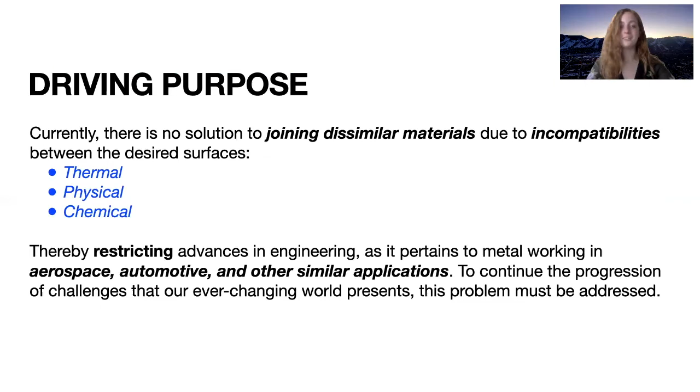So we have two primary objectives. The first one is to understand how the composition of multi-principal element alloys affects the diffusion and deformation mechanisms. And the second one is to design MPEAs that can act as a diffusion barrier to enable joining of incompatible materials while maintaining a physical interlayer which reflects the desired physical outcome required of its application.

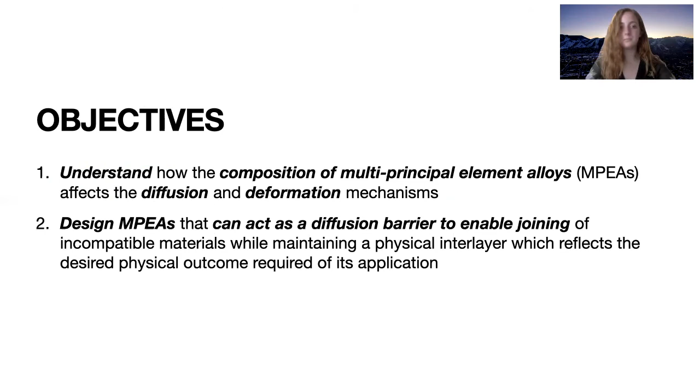So here are our methods. First, we have a basic game plan of how we wanted to attack our research. So task one, we wanted to make sure that we had a pretty strong understanding of some great alloys that we could actually work with. So first, we pared down all of our options with computational composition design, which we'll get into later. And then from there, we did some sample fabrication of our top ranked alloys, like which ones performed well in our computational composition design. And then we moved on from there.

The third task is to test diffusion behavior. Task 4 is to test phase stability. And task 5 was to understand the mechanical properties that these new MPEAs would present and really test them and make sure that they were giving us the physical outcomes we desired.

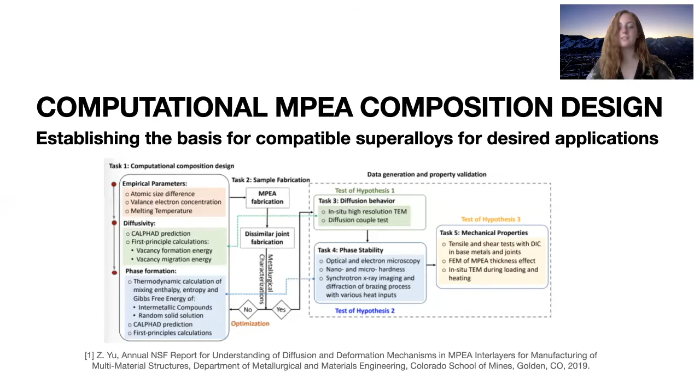So first, our computational MPEA composition design was a 3-step process employed to determine filler alloys for specific applications, which we have at the bottom of the screen. So first, there was a filtration code that was written in MATLAB to rank MPEA systems depending on the compatibility. This compatibility was between thermal, chemical, and physical compatibility.

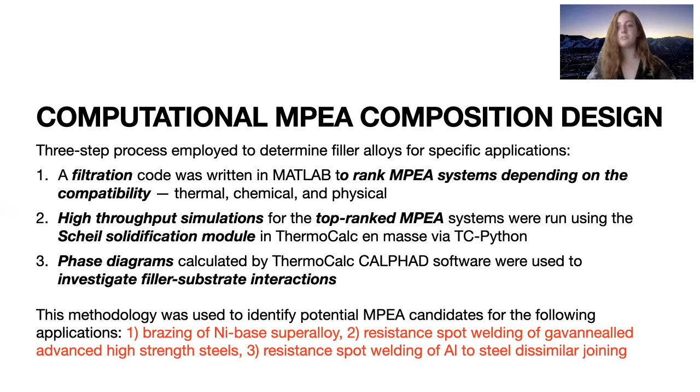The second step was high throughput simulations for the top ranked MPEA systems were run using the Scheil solidification module in Thermo-Calc via TC-Python. The third and final step was phase diagrams calculated by Thermo-Calc CALPHAD software were used to investigate filler substrate interactions. So this methodology was used for the 3 applications described below.

So first, here's a basic understanding of what our filtration code consisted of. So you can see on the left-hand side of the screen, it's just kind of a diagram explaining the physical dimensioning of our alloys that we were trying to figure out. And the highest ranked for this specific nickel-based alloy that we were looking for, you can see it on the screen below. And then to the right, you can see the order of filtration.

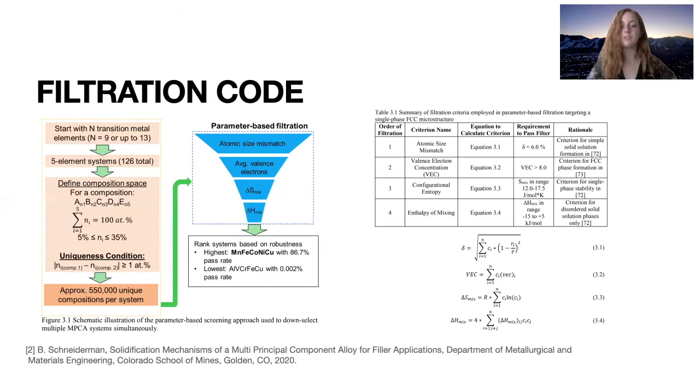So first it went through an atomic size mismatch, then a VEC or valence electron concentration criteria, then a configurational entropy criteria, and finally enthalpy of mixing. So we needed to make sure that these 4 criteria were met in order for us to feel confident about our microstructures of our MPEAs.

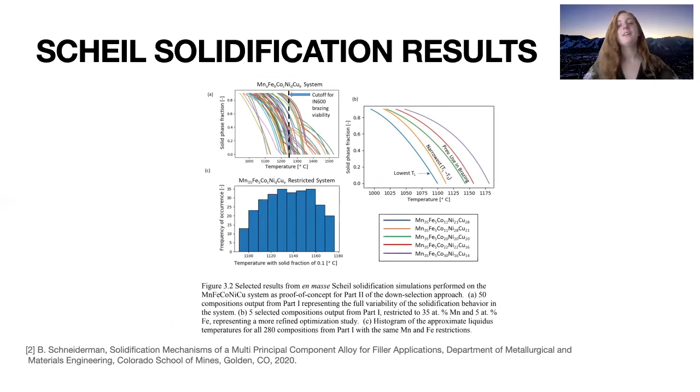So here are some basic Scheil solidification results we got from the same nickel-based alloy, which you can pause and watch if you want to. And then here's some examples of our brazing for our nickel-based superalloy, our sample fabrication. So here's our composition that we came up with.

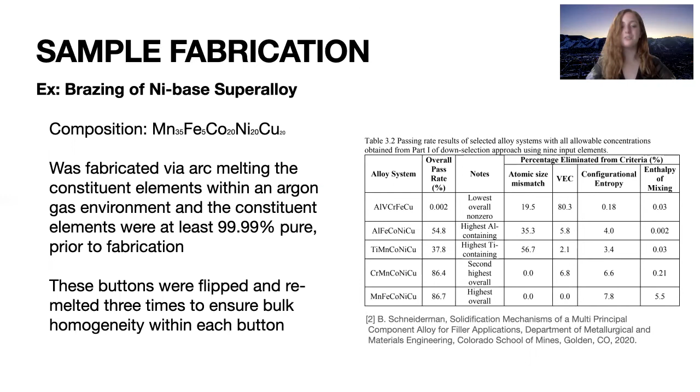And it was fabricated via arc melting of the constituent elements, which were at least 99.99% pure prior to fabrication. And with these buttons we really wanted to make sure that they were homogeneous. So they were remelted 3 times to make sure that it had bulk homogeneity before we moved on to further testing.

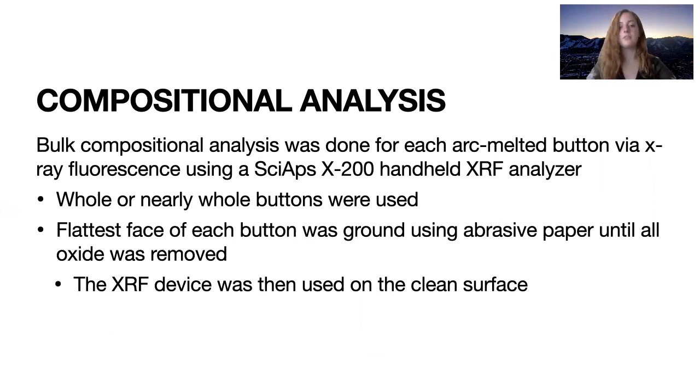So next we did some compositional analysis. Bulk compositional analysis was done for each arc melted button via X-ray fluorescence using the SciAps X-200 handheld XRF analyzer. So whole or nearly whole buttons were used, and the flattest face of each button was ground using 240 grit abrasive paper until all of the oxide was removed so that we could get a clean scan. And then the XRF device was used on that clean surface.

So what work are we currently working on? So present work as of January 2021, we're currently working with an alloy, which I'm not allowed to discuss because it's unpublished, but we're having some success with this alloy. But we have a processing route for how we want to mechanically test it.

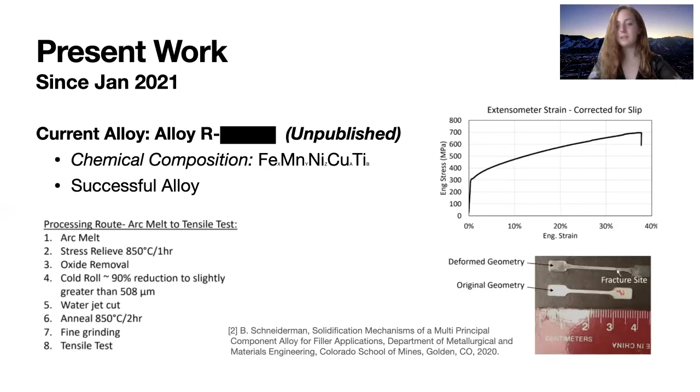So first we're trying to arc melt the button, and then we're going to stress relieve it at 850 degrees Celsius for an hour. And then we're going to use the 240 grit paper to do some oxide removal, then cold roll it, and then use a water jet cut and anneal at 850 degrees Celsius for 2 hours, and then do some fine grinding, and then finally we'll do a tensile test, which you can see on the right-hand side of the screen. That's an example of what we're going to be doing.

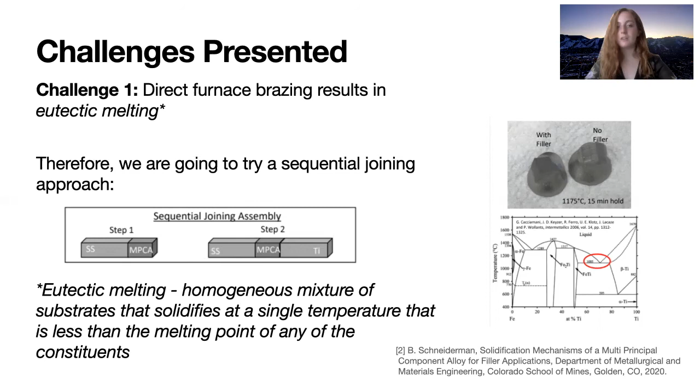So some of the challenges that are currently being presented, one, direct furnace brazing results in eutectic melting, which is not what we're looking for. Eutectic melting is a homogeneous mixture of substrates that solidifies at a single temperature that's less than the melting point of any of its constituents. So what we're going to try to do in upcoming months is to try a sequential joining approach in the vacuum furnace. And here are some of the results we've yielded with the direct furnace brazing prior to our sequential joining assembly.

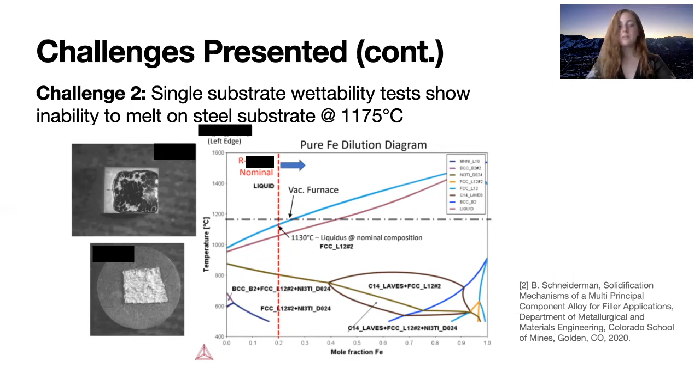And then the second challenge we're seeing right now is that we have a single substrate wettability test showing an inability to melt on a steel substrate at 1175 degrees Celsius. So we're looking to increase the temperature and see how that pans out for us.

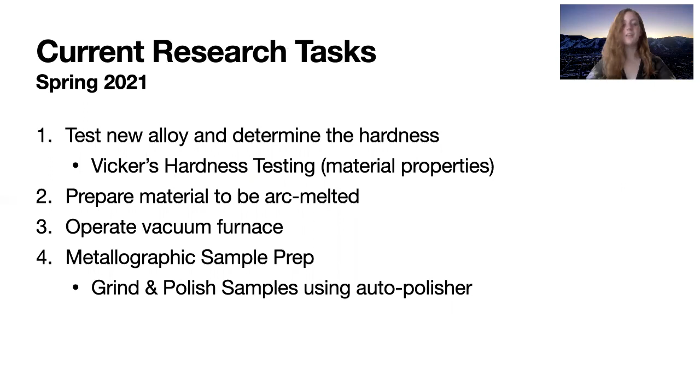So our current research tasks as of spring 2021, I've learned how to use the Vickers hardness testing machine to test material properties, specifically hardness. The second thing I've learned is how to prepare material to be arc melted. The third thing I've learned how to do is to operate a vacuum furnace. And I've become pretty well versed in how to sample prep for metallographic testing. So I've learned how to grind and polish samples using an auto polisher.